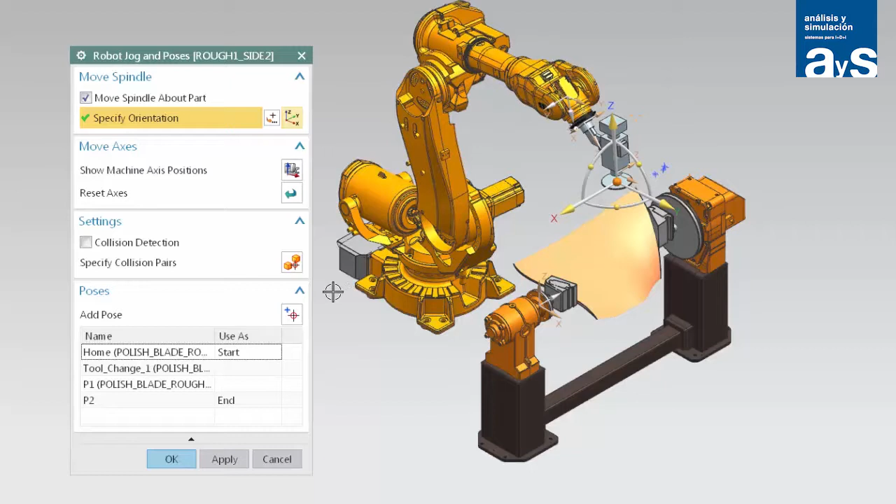Once defined, poses can be used as start and end positions in operations. Previously, you were required to create a user-defined event and manually enter numeric values copied from the Machine Axis Positions dialog box, which was difficult and time-consuming.

We'll begin by simulating the robotics machine tool. Select the robotic program, click Simulate Machine, then click Play.

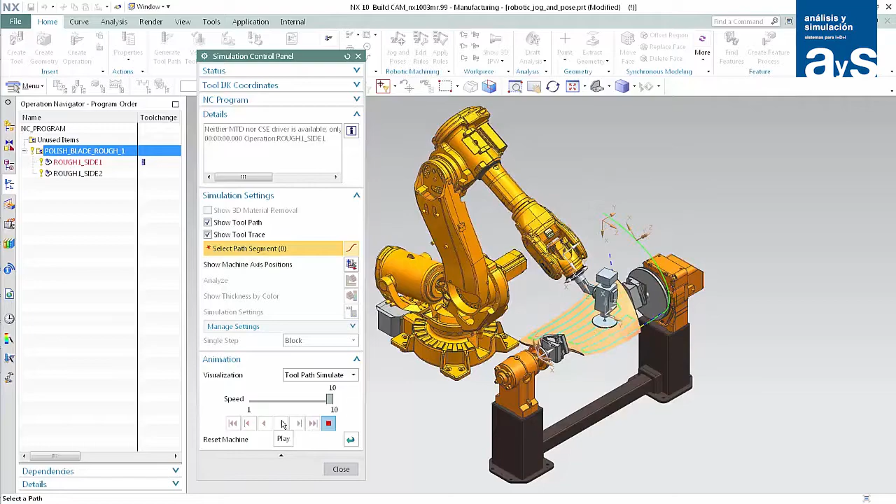Both sides of the blade are polished with no collisions or singularities occurring. Click Close in the Simulation Control panel.

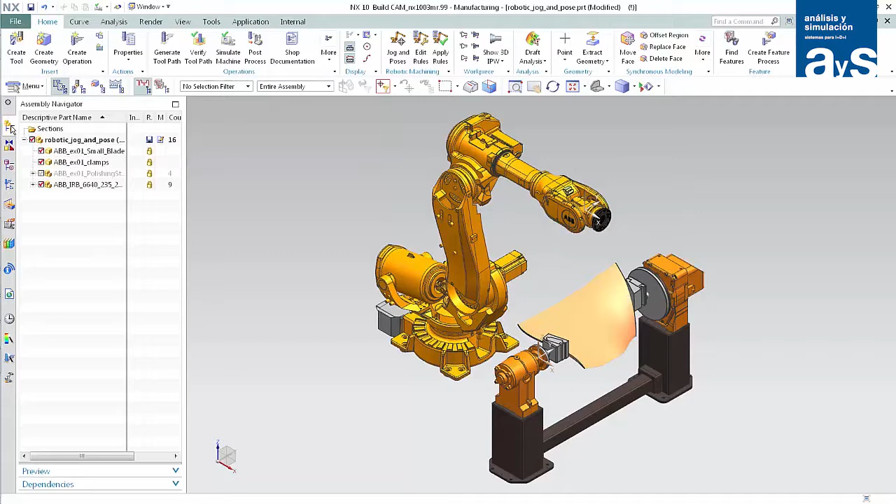Next, we'll view the existing poses. Select the Assembly Navigator tab, then select the Polishing Station checkbox to display the station. Select the Operation Navigator tab.

With the Polish Blade Rough 1 program selected, click Jog and Poses in the ribbon bar. This is an environment that allows you to jog the robot, including the head, tool, and other devices in the robotic cell, and capture poses graphically.

Previously, the Move Spindle, Move Axes, and Settings options were displayed only in the Preview Motion dialog box of the Machine Tool Navigator. Now these options are also displayed in the new Robot Jog and Poses dialog box along with the new poses list.

Because a program group is selected, all defined poses are listed whether or not they're used in an operation. Notice the Use As column is blank.

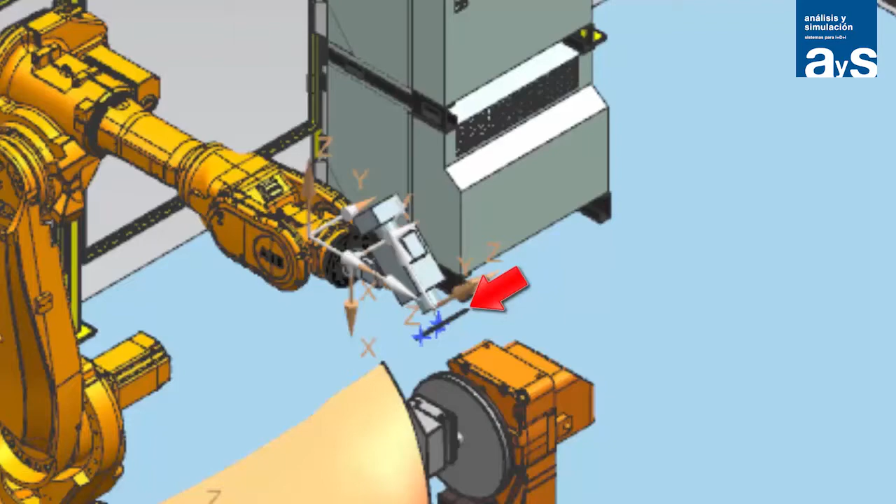Previously, the head holder and tool were not displayed on the machine tool. Now the head holder and tool used by the selected operation, or the first operation in the selected group, as in this case, are displayed.

Select the Move Spindle About Part checkbox to display the graphics handles. Select Tool Change 1 in the Poses list. Tool Change 1 positions the head near the rack.

Select P1 in the Poses list. P1 positions the head above the part. Click OK in the Robot Jog and Poses dialog box.

Now we'll add a pose to an operation. Poses may be added when a program or operation is selected. Poses cannot be added if an object in the Operation Navigator is not selected. In this example, we'll add a pose when an operation is selected.

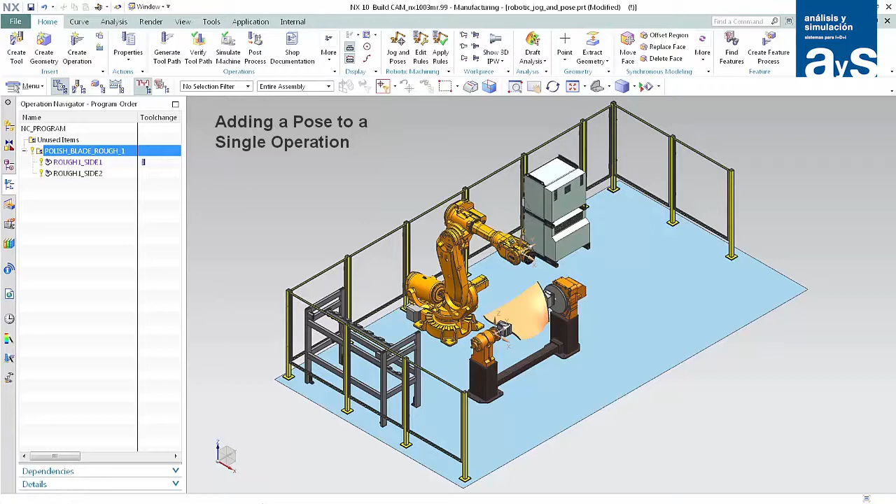Select the Rough 1 Side 2 operation. Click Jog and Poses in the ribbon bar.

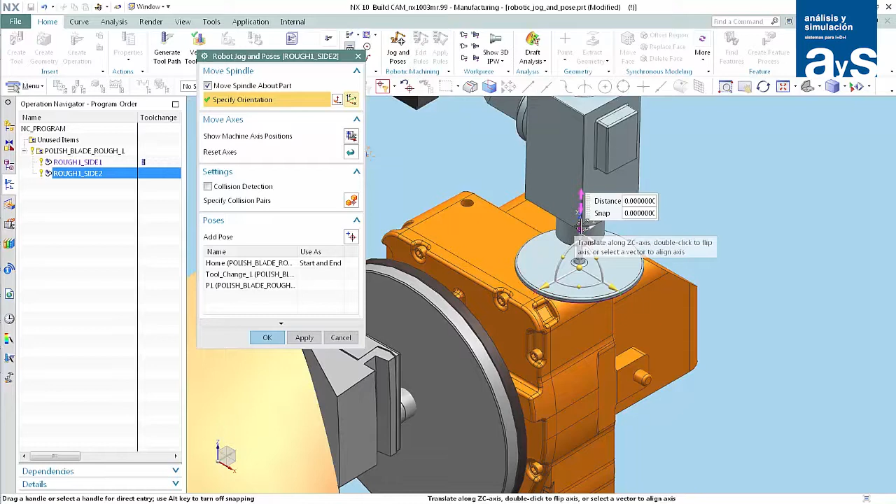Select the center point of the hole on the top face of the positioner. Select the Z arrowhead and the top face of the positioner. Drag the arrowhead up a distance of approximately 300.

Click Add Pose. Type P2 in the name column and press the Enter key.

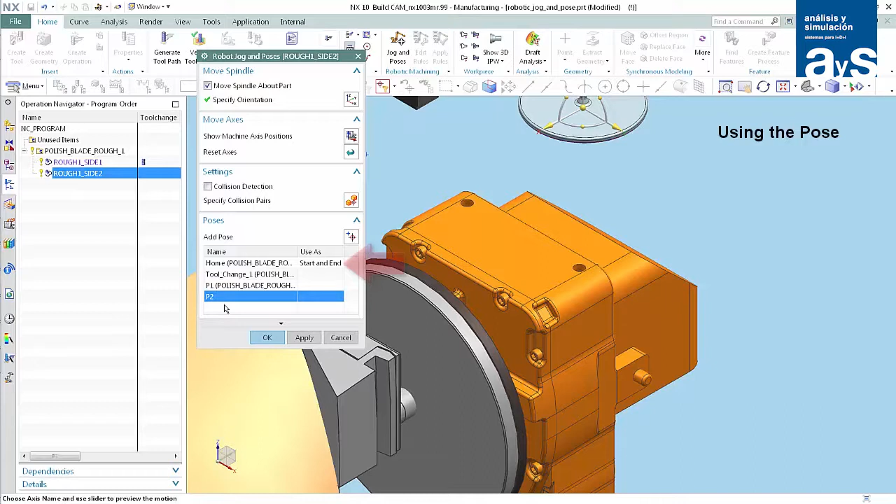Next, we'll use the pose. Poses may be specified in operations as Start, End, or Start and End. Notice that the Home pose is currently used as Start and End for this operation.

Right-click P2 and select Use as End Pose. Home is now specified as the Start pose and P2 is specified as the End pose. Click OK.

Click Apply Rules. Click OK in the Jog and Poses dialog box.

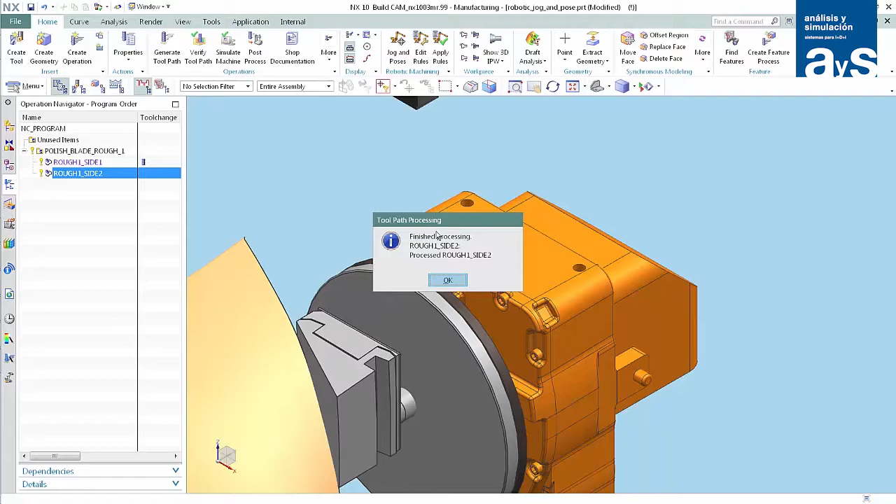With Rough 1 Side 2 still selected, click Simulate Machine. Click Play.

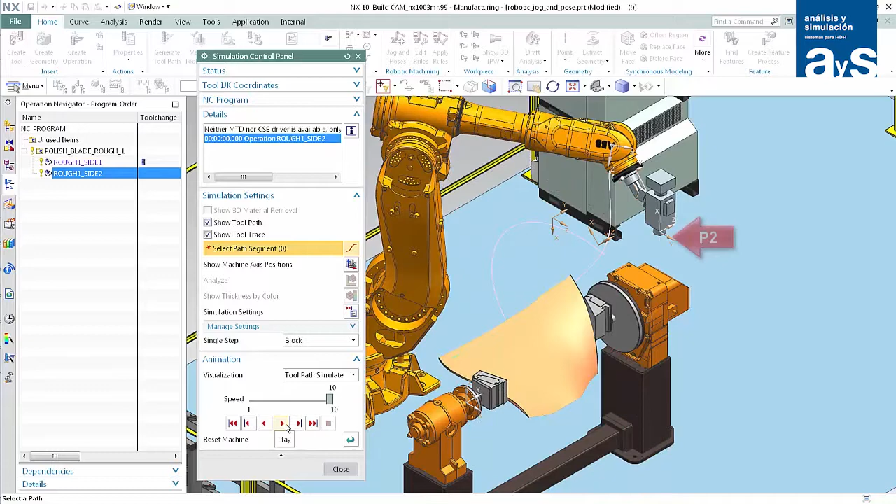The toolpath ends at P2. Click Close.

Now we'll edit a pose used by multiple operations. You may remove, rename, or update poses when a single program or operation is selected. When a program is selected, all operations in that program that inherit the edited pose are affected.

When an operation is selected, you may only edit poses that were defined locally and used by that operation alone. A pose used by multiple operations, that is, one that is inherited from a parent object, cannot be edited when an operation is selected.

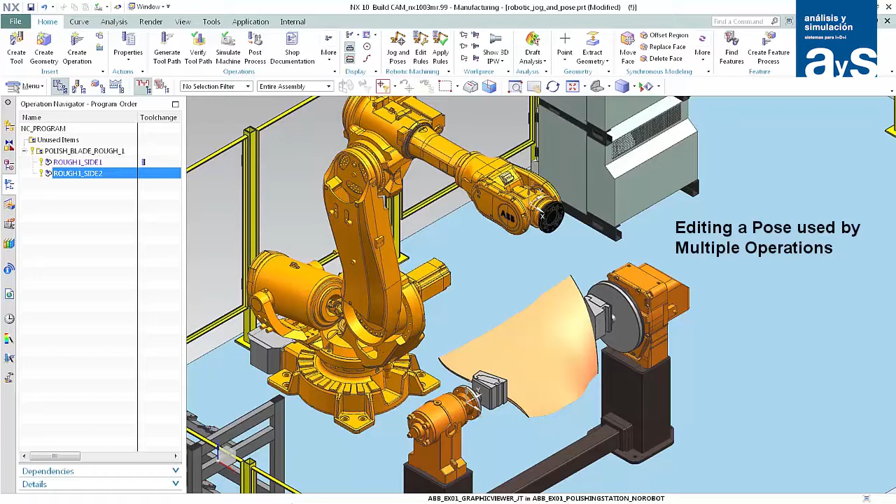In this example, we'll edit the home pose, which is used by both operations. To do this, we'll select the program containing both operations.

Select the Polish Blade Rough 1 program. Click Jog and Poses.

Select Home in the Poses list. Rotate the head about the XC axis approximately -35 degrees.

Drag the Z arrowhead approximately 100. Right-click Home and notice that you can remove, rename, and update the pose. Select Update.

Click Yes in the Edit Poses dialog box. Click OK in the Robot Jog and Poses dialog box.

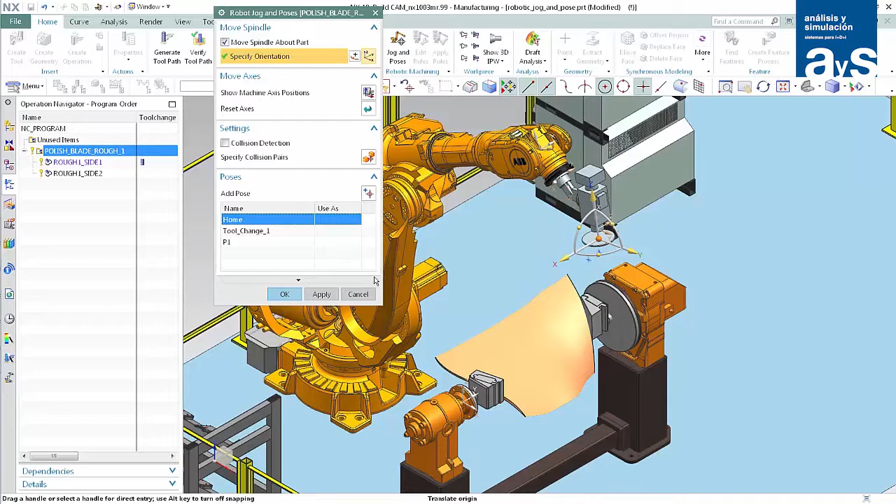With Polish Blade Rough 1 still selected, click Apply Rules. Click OK in the Jog and Poses dialog box.

Now we'll see how the home pose has been edited for both operations, while still being used as start and end in the Rough 1 Side 1 operation and start in the Rough 1 Side 2 operation.

Select the Rough 1 Side 1 operation. Click Jog and Poses.

Select Home in the Poses list. Notice that the home pose is at the position and orientation you specified and is being used as the start and end for this operation.

Also notice that P2 does not appear in the Poses list for this operation. This is because P2 was created inside the Rough 1 Side 2 operation. Click OK.

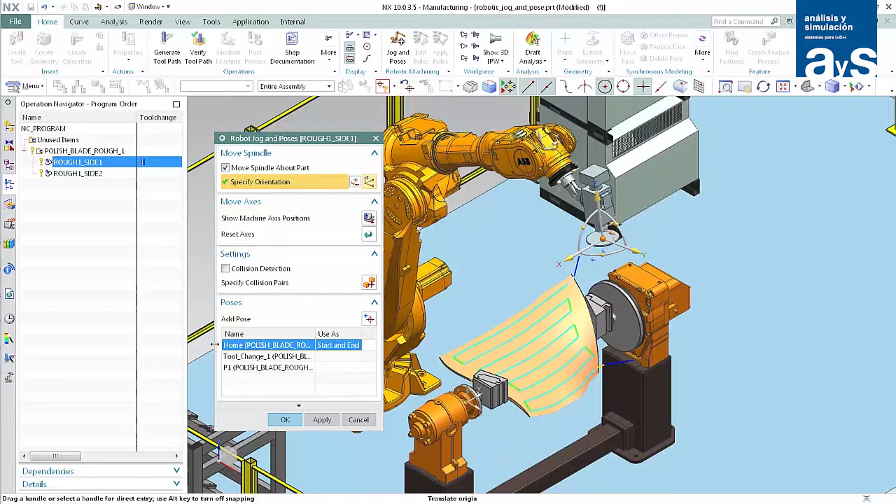Select the Rough 1 Side 2 operation. Click Jog and Poses.

Select Home in the Poses list. Notice that the home pose is at the position and orientation you specified and is being used as the start for this operation. Click OK.

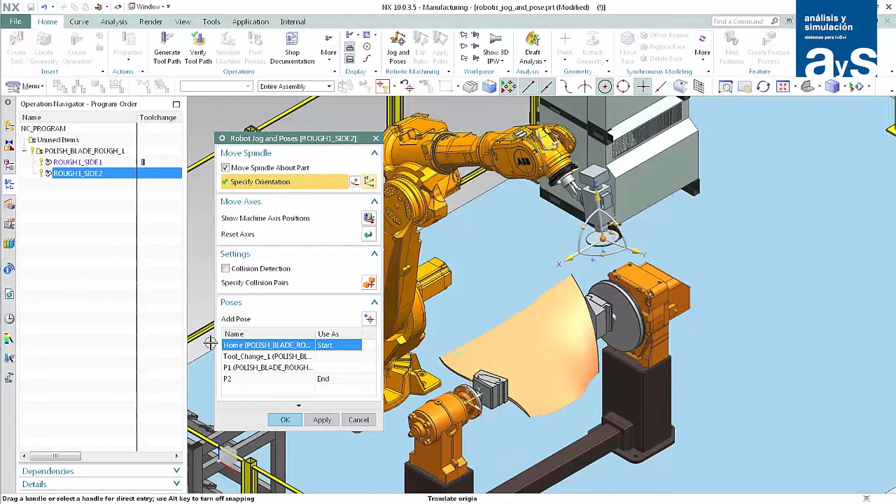Now we'll edit a pose used by a single operation. When an operation is selected, you may only edit poses defined locally and used by that operation alone.

With Rough 1 Side 2 selected, click Jog and Poses. Select P2 in the Poses list. Rotate the head about the XC axis approximately 30 degrees.

Right-click P2 and notice that additional options appear. Because you are editing a pose defined locally and used by a single operation, you can also specify it as a start pose, end pose, both start and end pose, or choose not to use it at all.

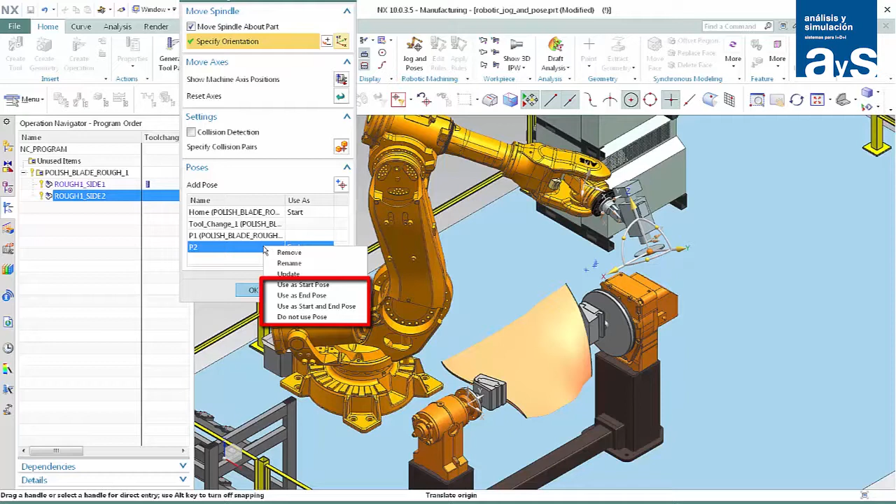Right-click P2 and select Update. Click Yes in the Edit Poses dialog box.

Right-click P1 and notice that you cannot edit this pose. That is, you cannot remove, rename, and update.

This is because P1 was defined in the parent program. Right-click Home and notice that you cannot edit this pose. Again, this is because Home was defined in the parent program. Click OK in the Jog and Poses dialog box.

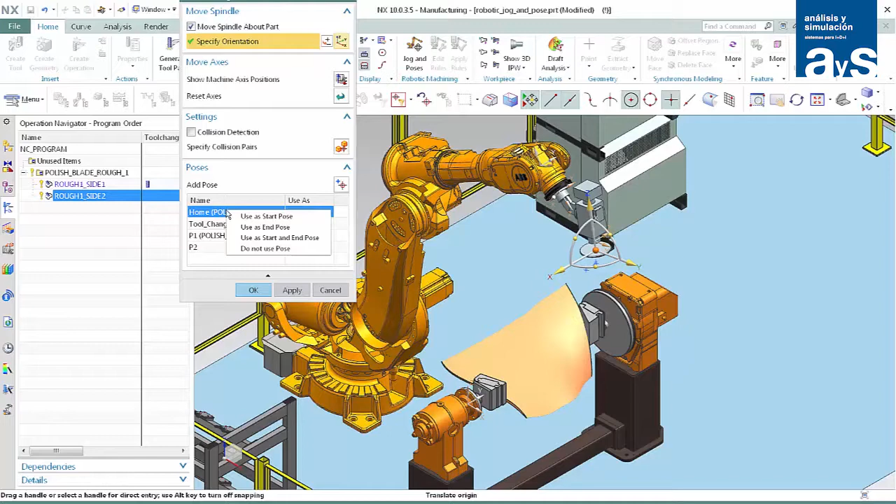This concludes the demonstration of how you can graphically jog the robotic arm and easily define machine poses. Thank you.